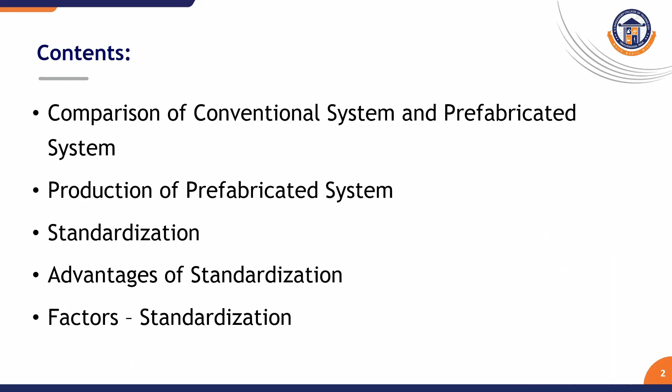So the comparison of conventional system and prefabricated system. In the conventional system, construction is done entirely on site using raw materials like bricks, concrete, and steel. Whereas in the prefabricated system, components such as beams, columns, slabs, and panels are manufactured in the factory under controlled conditions and then transported to the site for assembly.

The key benefits of prefabricated systems over conventional systems are faster construction, high quality control, less labor requirement on site, reduced material waste, and minimal dependency on the weather. Construction time is longer in conventional systems due to on-site work, curing periods, and weather dependencies, whereas prefabricated systems give faster construction as the components are pre-made and only assembled on site.

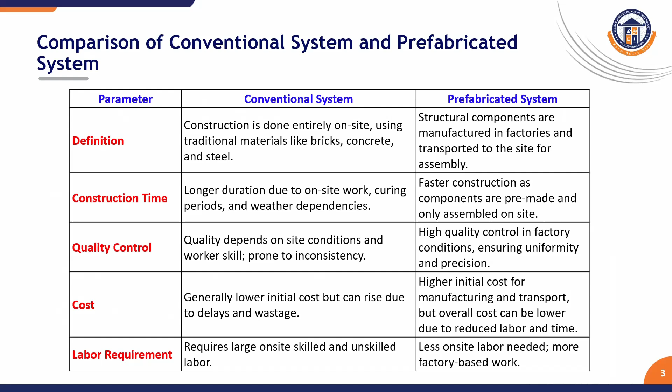In case of quality control, factory conditions ensure uniformity and precision in the prefabricated system, whereas in the conventional system, quality depends on site conditions and worker skills, prone to inconsistencies. Prefabricated systems have a higher initial cost for manufacturing and transportation, whereas conventional systems generally have a lower initial cost but it can rise due to delays and wastage. Skilled labor is necessary for conventional systems, while prefabricated systems need less on-site labor, with more factory-based work.

In case of flexibility in design, there is more flexibility for design changes during construction in conventional systems, whereas there is limited flexibility in prefabricated systems; once components are manufactured, we can't change the design. There is less waste due to precise factory fabrication, whereas there is more waste on site due to cutting and errors in conventional systems.

Coming to durability and performance, components are manufactured to high standards, ensuring better durability in prefabricated systems, whereas in conventional systems it depends on on-site practices, with variability possible. Conventional systems are suitable for small customized projects and locations without transportation restrictions, and prefabricated systems are best for large-scale projects or repetitive designs, for example housing and offices. In terms of environmental impact, conventional systems have higher impact due to on-site processes and transportation of raw materials, while prefabricated systems have lower impact due to controlled production and optimized material use.

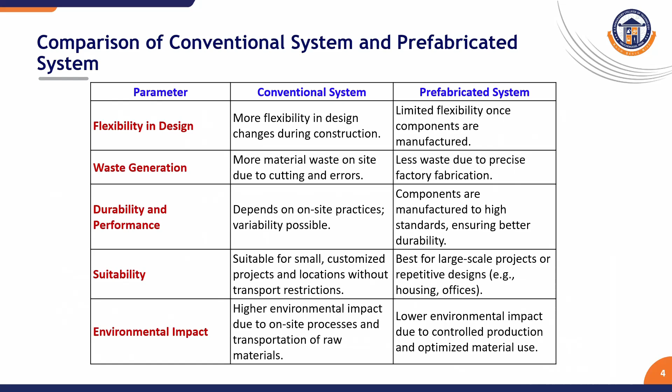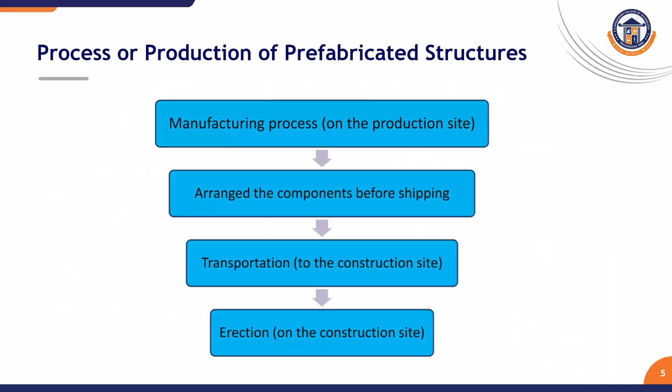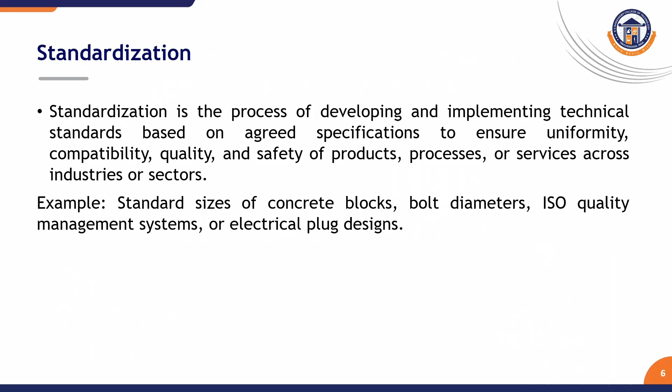So the production process of prefabricated systems involves manufacturing at the production site, arranging the components before shipping, transportation to the construction site, and erection on the construction site. Next, coming to standardization. Standardization refers to developing and implementing technical standards based on agreed specifications. Examples: standard sizes of concrete blocks, bolt diameters, ISO quality systems.

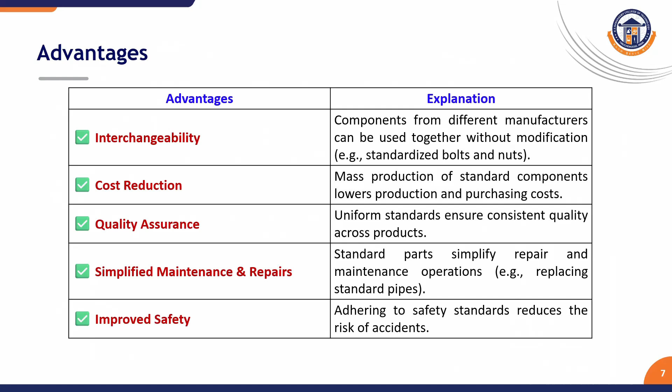The advantages of standardization are interchangeability, cost reduction, quality assurance, simplified maintenance and repairs, and improved safety. Interchangeability means components from different manufacturers can be used together without modifications. Mass production of standard components lowers production as well as purchasing cost, and a uniform standard ensures consistent quality across products. Standard parts simplify repair and maintenance operations, and adhering to safety standards reduces the risk of accidents.

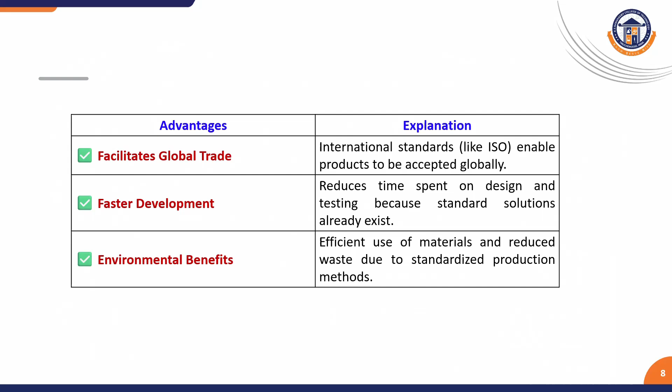Some other advantages are that it facilitates global trade and faster development and environmental benefits. In terms of environmental benefits, there is effective use of materials and reduced waste due to standardized production methods, whereas international standards like ISO enable products to be accepted globally. Global compatibility in international markets and simplified maintenance are advantages of standardization.

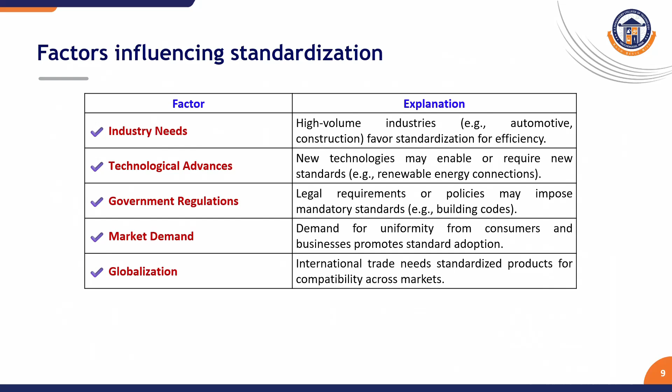The factors influencing standardization are industry needs, technological advances, government regulations, market demand, globalization, economic factors, and environmental considerations. High volume industries favor standardization for efficiency. New technologies may enable or require new standards. In terms of government regulations, legal requirements or policies may impose mandatory standards, demand for uniformity from consumers and businesses promotes standard adoption, and international trade needs standardized products for compatibility across markets.

Economic considerations, safety and reliability, availability of materials, and environmental impacts are some other factors, considered in terms of eco-friendly practices, standard sizes, ensuring consistent safety and performance levels, and cost-saving opportunities and economies of scale-driven standardization.

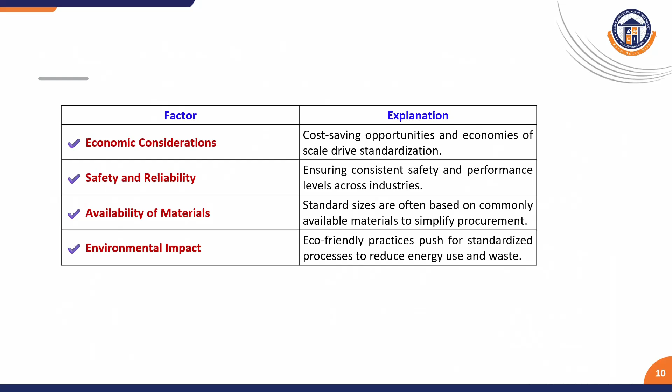Next, transportation of prefabricated structures. After factory manufacturing, the components need to be transported to the construction site. The methods of transportation are by road, rail, and ship. By road, we can use flatbed trucks, trailers, or specialized vehicles. Rail is suitable for heavy or long distance transport. Ships are used for overseas delivery. Specialized transport vehicles like hydraulic trailers or multi-axle platforms for oversized loads can be used for transportation.

Important considerations for transportation: proper packaging and anti-corrosion protection is essential. Careful loading and unloading to prevent damage. Compliance with transport regulations such as size and weight limits. Ensuring component stability during transit, and scheduling transport to avoid site congestion.

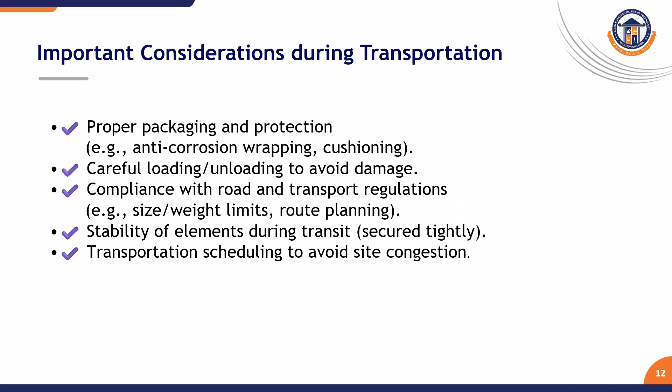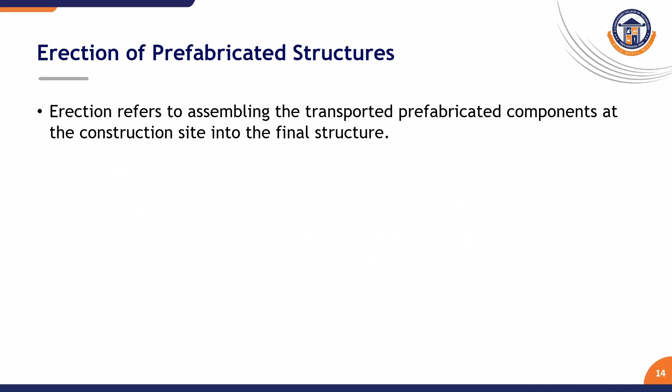So, erection of prefabricated structures. Erection refers to assembling prefabricated components on the construction site to form the final structure. The steps involved in erection are site preparation, which ensures the foundations and supports are ready before starting the assembly. Lifting and positioning components: use cranes, that is mobile or tower cranes, to lift and position beams, columns, panels, and slabs.

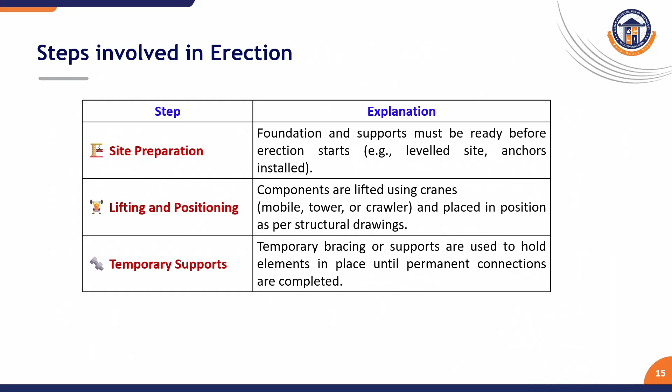Next, temporary supports. Temporary bracing is used to hold the elements in place during assembly. Connecting components: connections use bolts, welding, and fasteners designed for prefabrication. Ensure alignment and leveling: precision instruments ensure proper alignment for structural integrity. And finishing works: joints are sealed and electrical and plumbing installations are integrated.

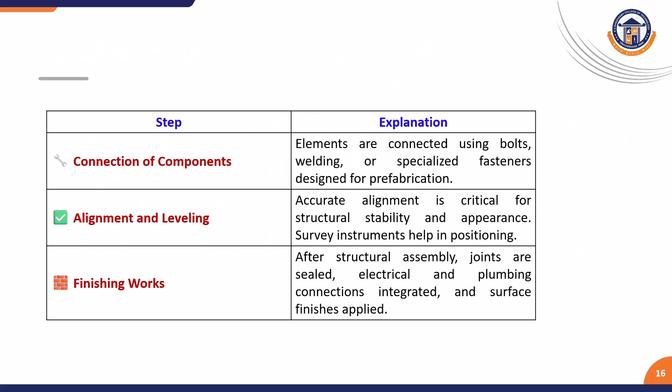In conclusion, we can say that the production, transportation, and erection of prefabricated structures form an integrated system that boosts construction speed, quality, and sustainability. Careful planning of each step from manufacturing to on-site assembly is key to successful prefabrication.